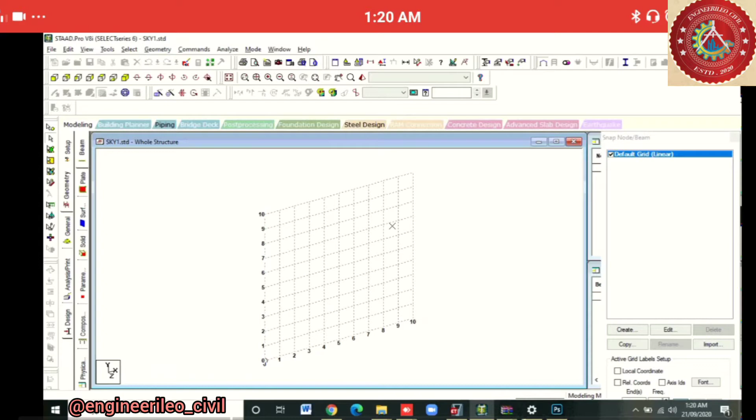सॉफ्टवेयर ओपन हो रहा है। सॉफ्टवेयर ओपन होने के बाद हम ज्योमेट्री में जाएंगे, ज्योमेट्री में रन स्ट्रक्चर विजार्ड से स्ट्रक्चर इंसर्ट करेंगे। ये एक स्काईस्क्रेपर है तो जाहिर सी बात है बहुत सारे फ्लोर होंगे उसमें, यानी हम 40 स्टोरी बिल्डिंग डिज़ाइन करने वाले हैं।

यहाँ पे फ्रेम मॉडल्स ले लेते हैं और बे फ्रेम पे डबल लेफ्ट क्लिक करते हैं। यहाँ पे लेंथ, हाइट, विड्थ और नंबर ऑफ बेज़ अलॉन्ग लेंथ, हाइट, विड्थ हमको डिफाइन करना है। तो मैं लेंथ और विड्थ 21 ले लेता हूँ और फ्लोर टू फ्लोर हाइट 3 ले लेता हूँ।

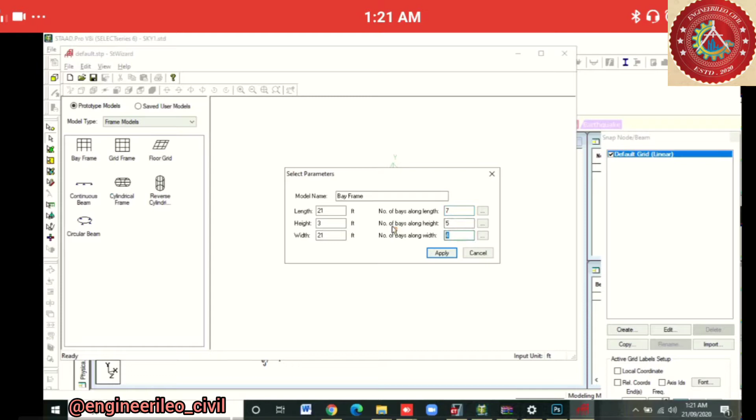क्योंकि ये 3 फीट है हम वहाँ पे 1 मीटर लेंगे, तो थोड़ा ध्यान रखना, आपके इसमें 3 मीटर डाल देना। नंबर ऑफ बेज़ अलॉन्ग लेंथ 7, नंबर ऑफ बेज़ अलॉन्ग विड्थ 7, और अलॉन्ग हाइट 1, फिर अप्लाई करेंगे।

देखिए मेरे पास ये फ्रेम स्ट्रक्चर आ गया है। मैं इसको दो तरीके से कर सकता हूँ, या तो फाइल में जाके मर्ज मॉडल विद स्टैड प्रो कर दूंगा, या मैं डायरेक्टली इसे क्लोज करके यस करूंगा, और विल टेक 0 0 0 ऑन XYZ एक्सिस। तो हमारा ये फीट में था इसलिए थोड़ा छोटा स्ट्रक्चर आया है।

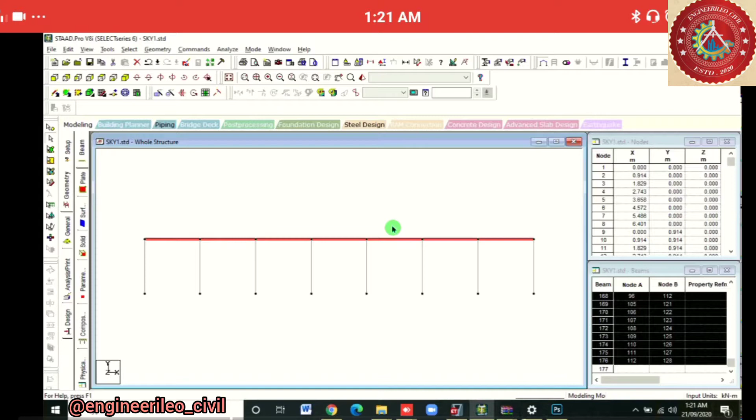कोई बात नहीं, मैं आपको सिखा देता हूँ, आप अपने हिसाब से उसको अरेंज कर सकते हो। ये हमारा स्ट्रक्चर बन गया है। हम इसके फ्रंट व्यू में जाएंगे और विल सिलेक्ट द टॉप बीम्स, फिर विल डू ट्रांसलेशनल रिपीट इन वाई डायरेक्शन।

टोटल 9 स्टेप्स और स्पेसिंग 1 मीटर क्योंकि वो 3 फीट थी, और विल लिंक स्टेप्स एंड ओके। तो हमारे स्ट्रक्चर का कंटिन्यू होना चालू हो गया है। देखिए ये बन गया हमारा 9 स्टेप्स।

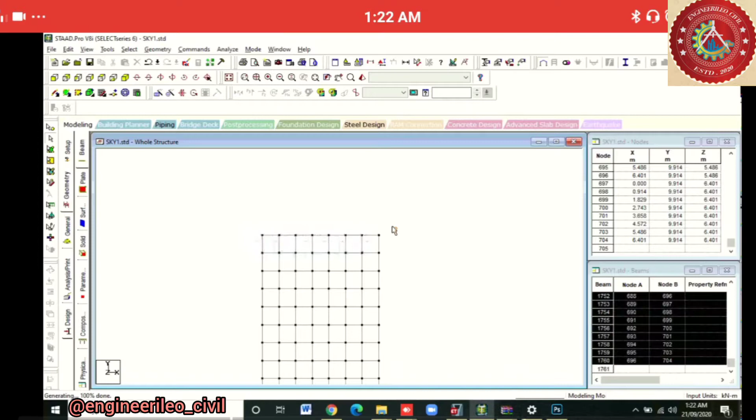अब इसके टॉप स्टोरी में जाएंगे। टॉप स्टोरी की बीम सिलेक्ट करेंगे, राइट क्लिक, न्यू व्यू, और फिर डिस्प्ले द व्यू इन एक्टिव विंडो। तो हमारे पास ये आ गई है, हम इसके टॉप व्यू में जाएंगे।

टॉप व्यू में ऐसे दिखता है। हम बीम कर्सर लेके अंदर की बीम्स सिलेक्ट करेंगे, तो ये बीम सिलेक्ट हो गई है। हम वापस डिस्प्ले होल मोड में जाएंगे, फिर ट्रांसलेशनल रिपीट इन वाई डायरेक्शन, टोटल नंबर ऑफ स्टेप्स 10, स्पेसिंग 1 मीटर, और विल लिंक द स्टेप्स एंड ओके।

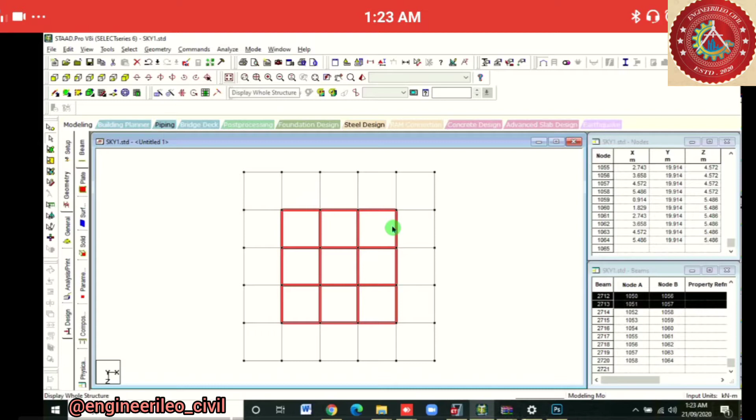टॉप व्यू में हम बीम्स इनसाइड पार्ट ऑफ सिलेक्ट करेंगे। आप देख सकते हैं मेरा कर्सर अटक चुका है स्क्रीन में, आई एम सॉरी फॉर दैट, सम सिस्टम प्रॉब्लम्स। फिर विल गो टू होल स्ट्रक्चर, डिस्प्ले होल स्ट्रक्चर एंड ट्रांसलेशनल रिपीट।

ट्रांसलेशनल रिपीट इन वाई डायरेक्शन और स्टेप स्पेसिंग 1 मीटर। यहाँ पे 3 मीटर लेना था लेकिन मैंने फीट में बना दिया इसलिए 1 मीटर ले रहा हूँ। नंबर ऑफ स्टेप्स लेंगे हम 10, लिंक स्टेप्स एंड ओके।

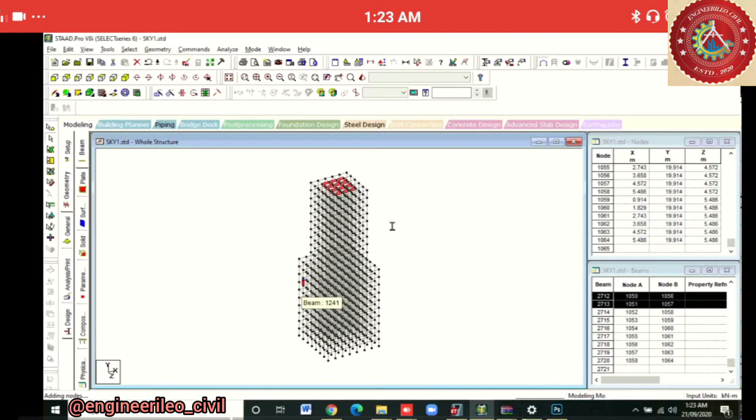ठीक है, ये ट्रांसलेशनल रिपीट हो रहा है। अगेन विल गो टू डू द सेम प्रोसेस। नाउ विल टेक अगेन द टॉप स्टोरी एंड न्यू व्यू, डिस्प्ले द व्यू इन न्यू विंडो एंड टॉप व्यू, और फिर वी आर गोइंग टू सिलेक्ट द बीम्स ओवर हियर।

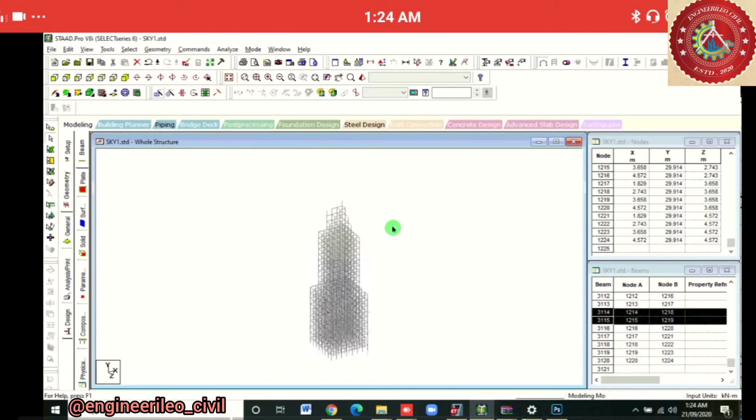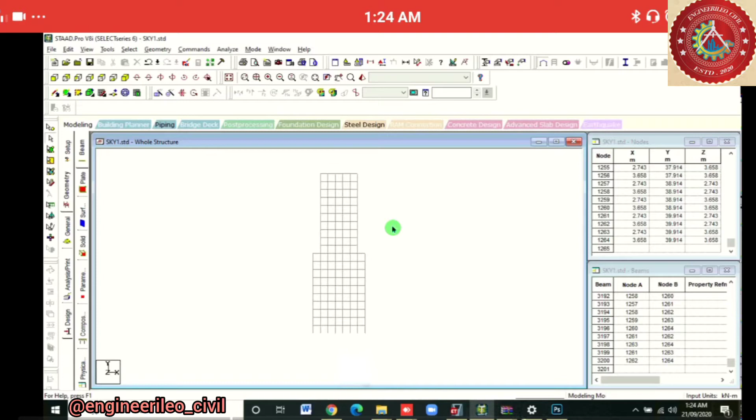तो हमारा देखिए ये पूरा स्ट्रक्चर हमारा कंप्लीट हो चुका है। फिर हम एकदम नीचे फ्रंट व्यू में जाएंगे। फ्रंट व्यू में जाने के बाद इसकी एक ग्राउंड फ्लोर, जो फर्स्ट फ्लोर वाला है ना बीम, ये सिलेक्ट करना है।

ओके, फिर विल गो टू न्यू व्यू एंड डिस्प्ले न्यू व्यू, फिर टॉप व्यू। टॉप व्यू में हमें यहाँ पे प्लेट्स क्रिएट करनी है, तो विल क्रिएट अ प्लेट्स फ्रॉम हियर एंड दिस पॉइंट, वी विल क्रिएट अ प्लेट्स फ्रॉम हियर, 4 नोड प्लेट्स, दिस पॉइंट, देन टू दिस पॉइंट, देन दिस पॉइंट, एंड एट लास्ट दिस पॉइंट।

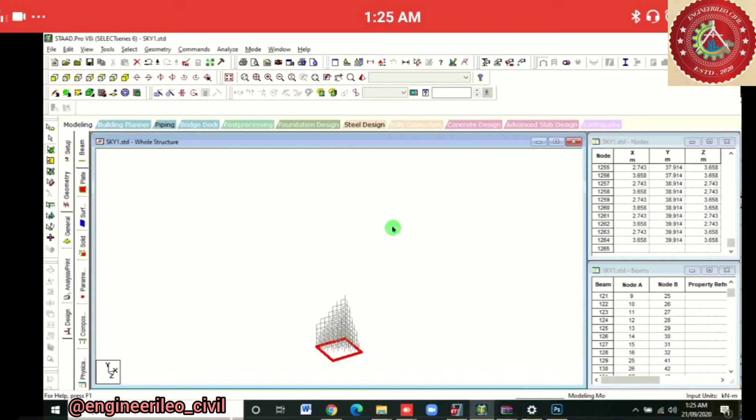विल ट्रांसलेशनल रिपीट टू दैट प्लेट इन वाई डायरेक्शन इन 1 मीटर डिस्टेंस, एंड नंबर ऑफ स्टेप्स इज़ 9, एंड लिंक स्टेप्स - नो, वी डोंट हैव टू लिंक स्टेप्स, एंड देन ओके। तो हमारी ये प्लेट्स ट्रांसलेशनल रिपीट हो रही है।

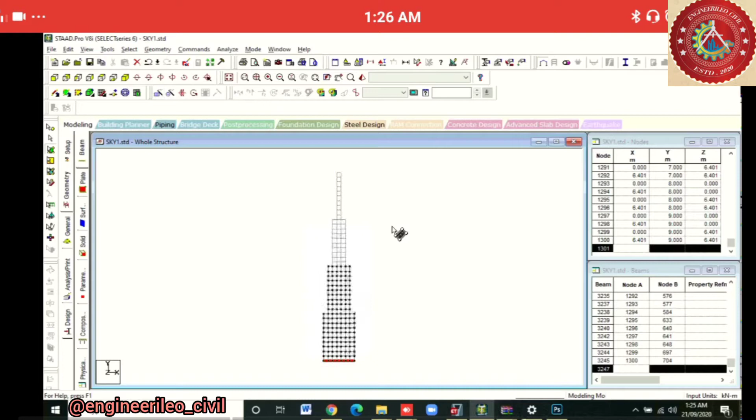फिर विल गो टू फ्रंट व्यू एंड देन विल सिलेक्ट द बीम्स ऑफ दिस लेयर। यू कैन सी ओवर हियर आई हैड सिलेक्टेड दिस, सिलेक्ट इट वेरी केयरफुली।

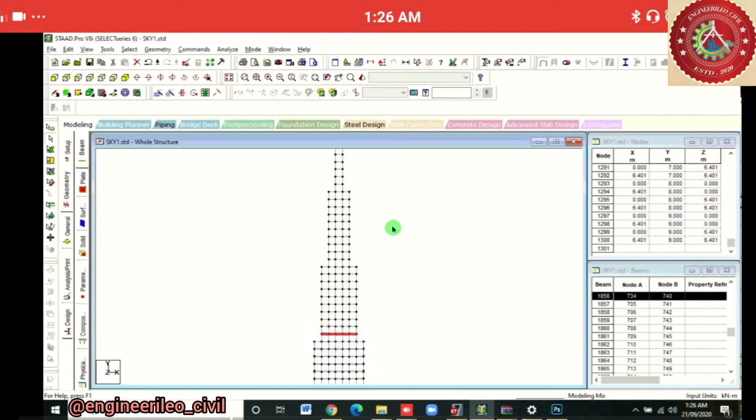You don't have to select the columns overhead. Okay, I had selected this. Again right click, new view, display, and then OK.

Then we'll go to top view and add a 4-noded plate. First this point, then this point, then the third point, and then the fourth point. So plates are added. We'll select this plate and go to whole structural view. We'll translational repeat this plate in Y direction, default spacing is 1 and number of steps is 10. We don't have to link the steps, and then OK.

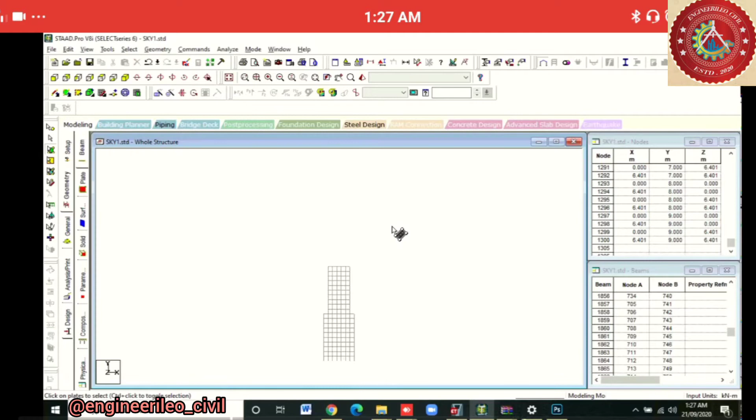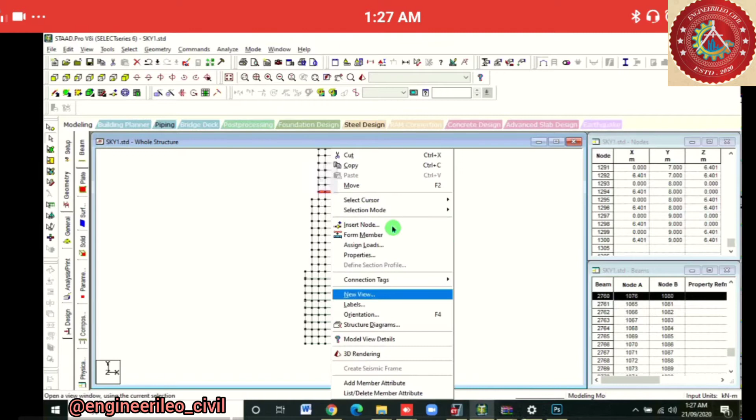We've completed 2 steps, first and second. Now it's turn for the third one. We'll select these beams carefully, right click, new view, display whole structure in same window, in the active window, and here we'll add 4-noded plates, point number 1, point number 2, point number 3, and point number 4.

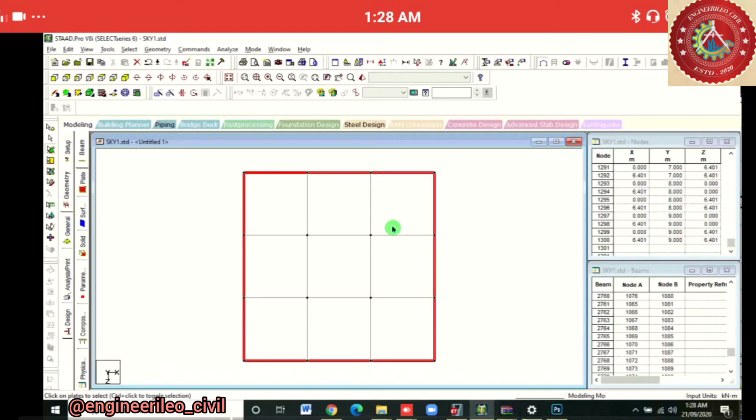And then we'll select this plate and view whole structure, translational repeat in Y direction in 1 meter spacing, total number of steps 10, do not link the steps, and then OK.

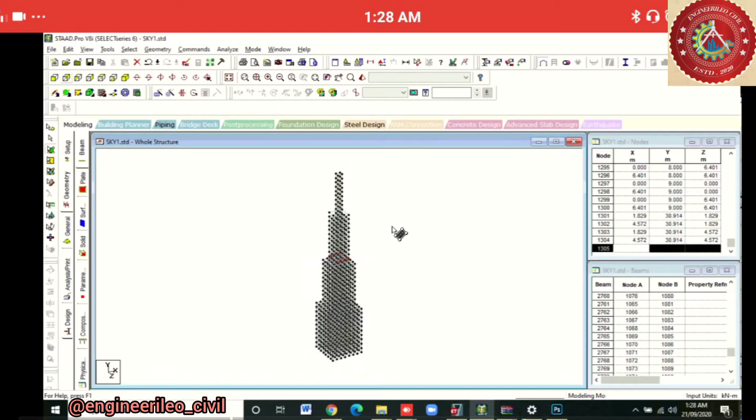So here the plate has been translational repeated, and then we'll go to front view and see that an extra plate has been created over here. Again the plate cursor, we'll select this plate, delete, OK, OK, OK.

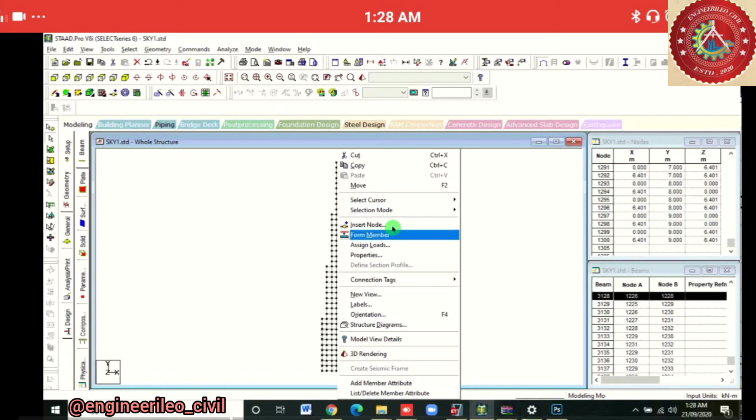Then for this last one we'll again select this part, right click, new view, and then display, OK, top view, and then we'll create a plate from this cursor to second point, third point, and fourth point.

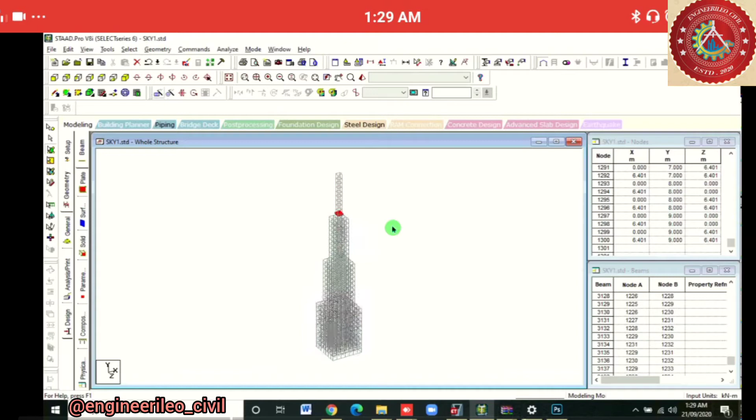We'll select the beam, select the plate, display whole structure, translational repeat, Y direction, spacing is 1, steps are 10, do not link the step, and then OK.

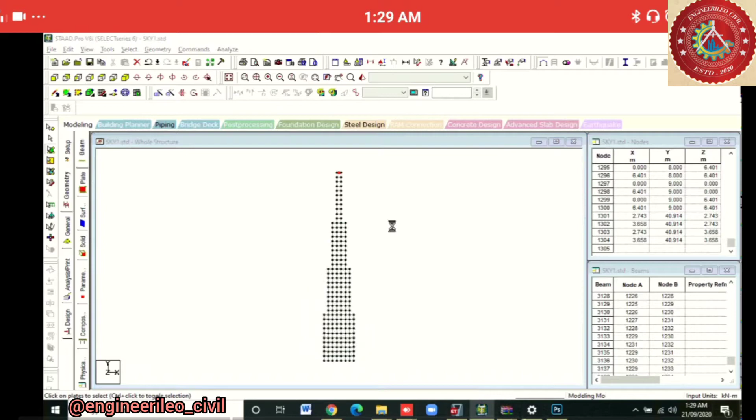And finally we'll go to front view because one plate has been generated extra. We'll delete this. Okay, yes.

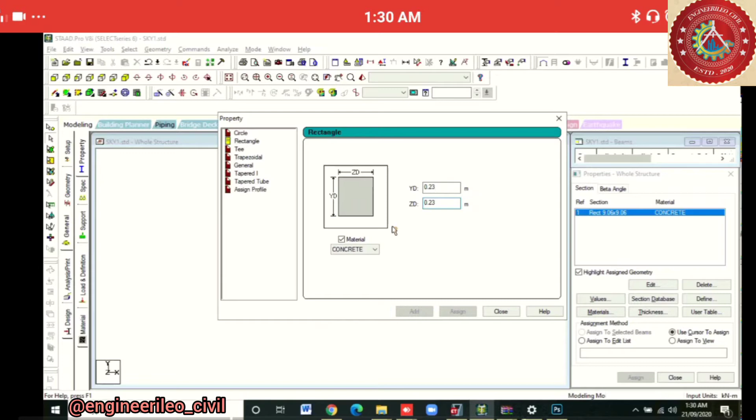Now we'll go to general view, general menu. There we'll add property, then we will define property. I am taking the same size for beam as well as for column for easy designing. You can take different sizes. I'll take here 0.23 meter by 0.23 meter size of beam and column, and close.

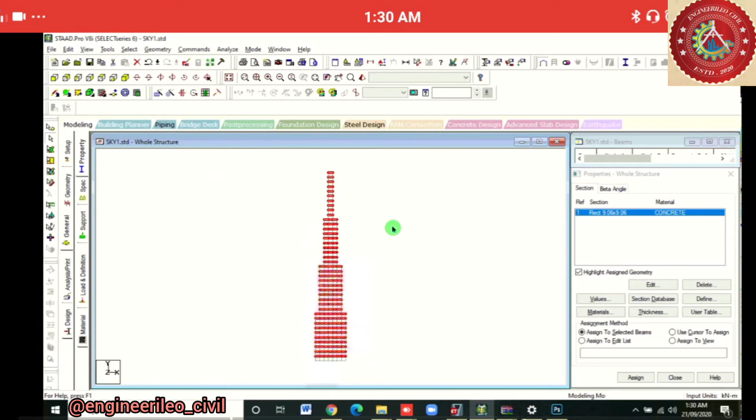Then I'll assign for beam, select. We'll go to select for assigning beam, select beams parallel to X and select beam parallel to Z. Here the beams will be assigned. For assigning column we'll go to select beams parallel to Y, so columns will also be assigned.

We'll go directly to assign to view and then assign, and yes. All the members, all the beam and column elements will be assigned over here. You can see that thing.

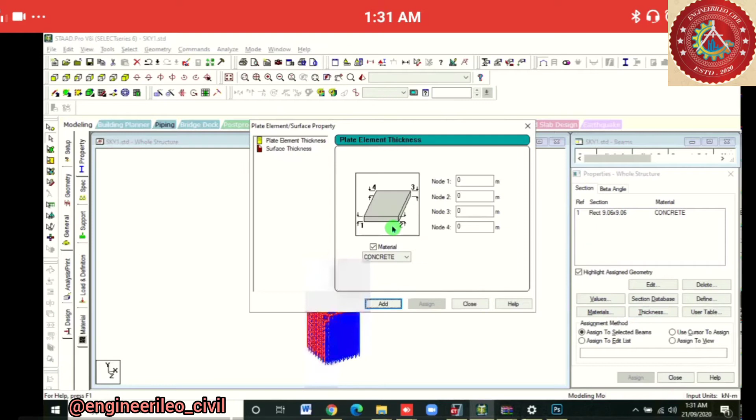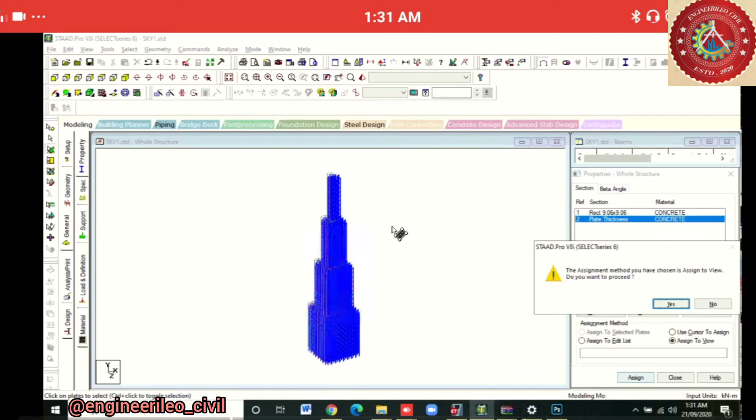Then we'll again go to property. We'll add thickness to the plates, a thickness of 0.2 meter, add and close. Again you can go from plates cursor and select whole plates, or directly go to assign to view and assign, and yes, the whole plates will be assigned automatically.

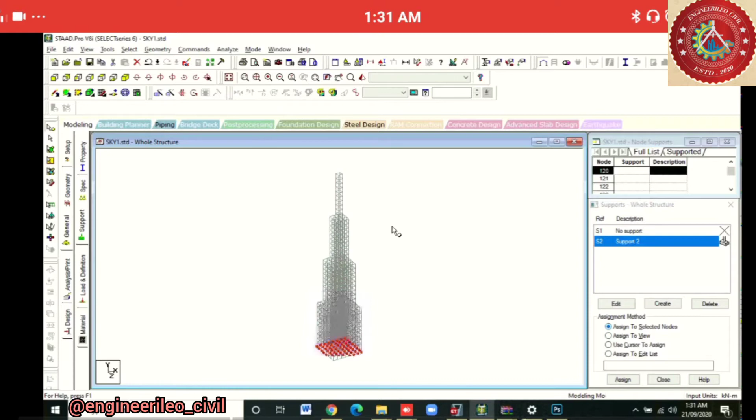Then we'll go to give the support. Support will create a fixed support, add, and then go to front view. We'll select the nodes of the bottommost part, select the support, and assign the supports to the selected nodes. Assign, yes. The support is assigned.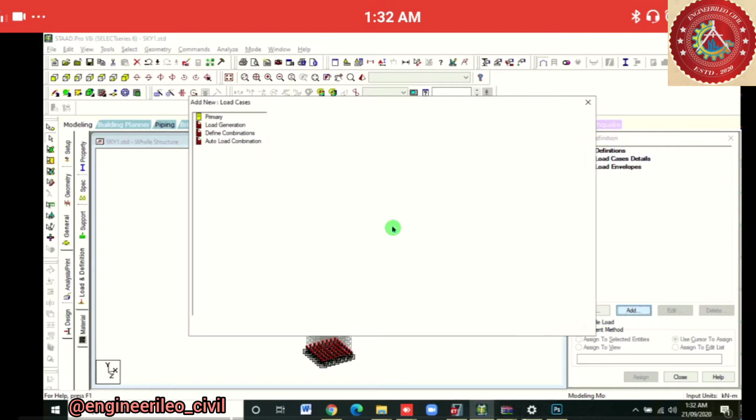Then we'll go to load and definition. Because it's a skyscraper building, different types of load will act on it, like wind load, dead load, live load. In general I will take live load and dead load only, and will not consider wind load in this case because the video will become too lengthy. If you want to learn the wind load part, you may refer to the water tank video. So we'll go and add dead load and add, and live load.

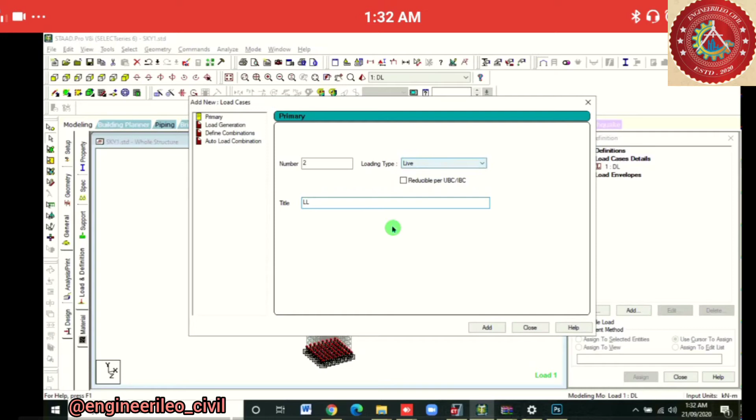We have defined the parameters here, add and close. In dead load we'll add the self weight, add, close. The self weight will be assigned to view, assign, yes.

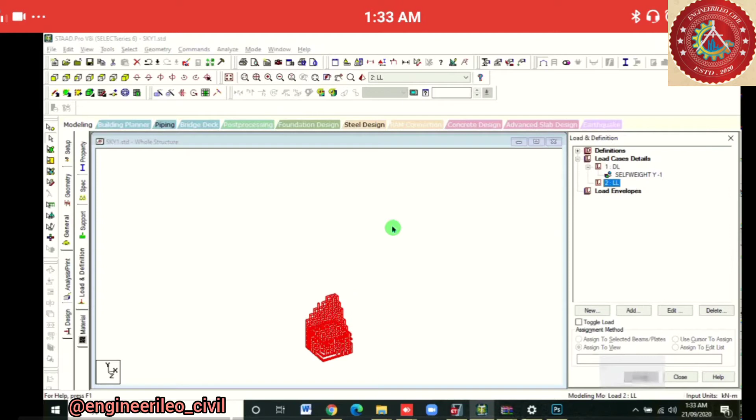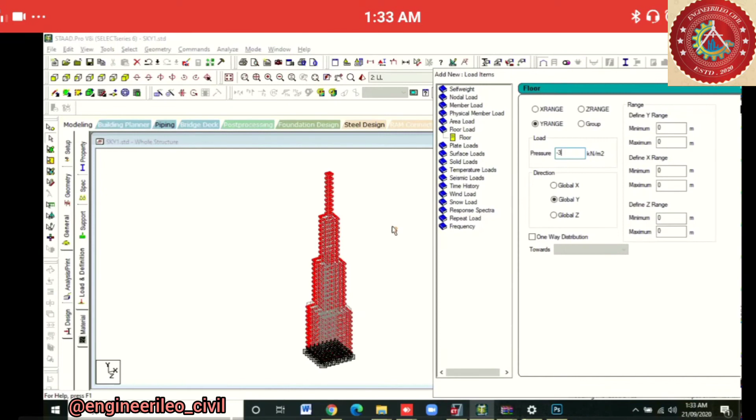In live load we'll add floor load. We'll go to floor load. I'll add -3 kilonewton per meter square in Y range direction, and minimum and maximum we'll check it out. We'll go to node cursor, go to the lowest node, double tap on that thing. The lowest node is Y 1 meter.

Close. We'll go to the topmost node, select that and double tap on that: 39.914. Close. Minimum we'll write 1 meter, and in maximum we'll write 39.914.

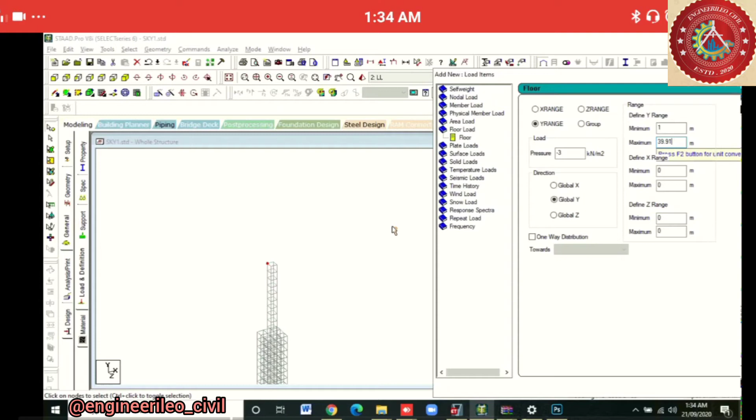Okay, my mouse had been stuck. Excuse me for a minute.

So we'll add over here and then close. So our dead load and live load has been added.

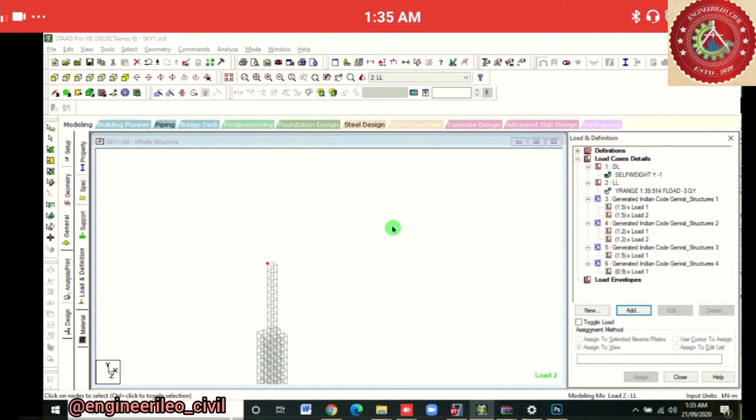Then we'll go to load case details and add some load combination. We'll generate it automatically using IS codes, generate loads, and then add and close. We'll go to print and analysis, and we'll add a print with no print, close, analysis, run analysis, save the structure, and the analysis is running.

It will have to give us 0 error. If error came, then we need to resolve it by going to the output file. Okay, and let's see what happens.

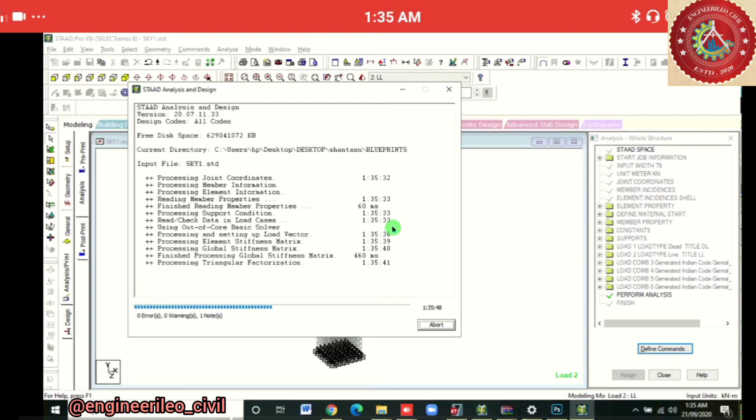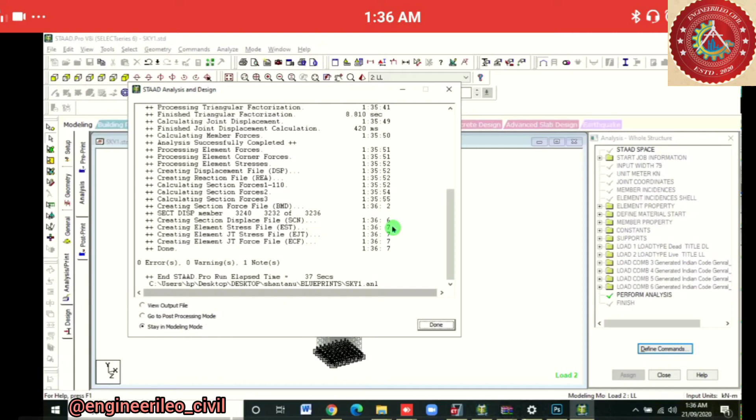Okay, the analysis is done. Now we will design this building. We'll go to the design part. We'll design it for concrete, and the code is IS 456, the Indian code. We'll select parameters, and we'll take FC and FY main.

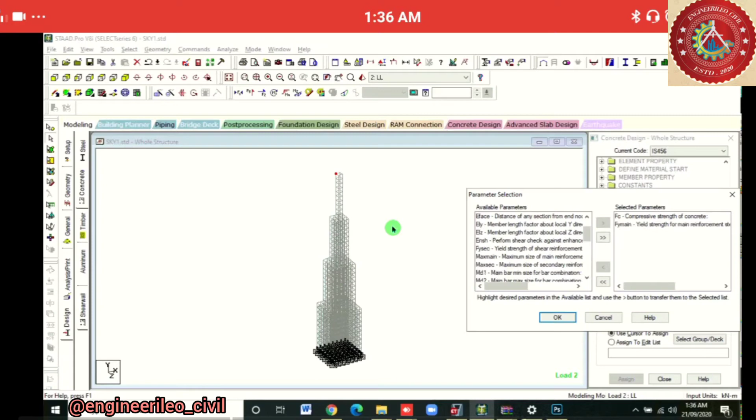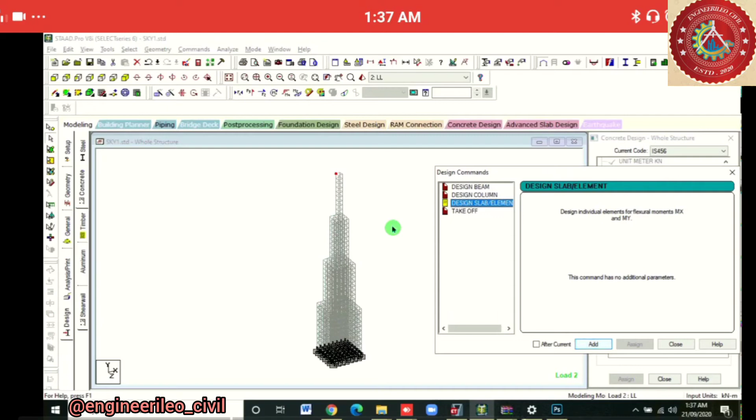Then we'll define the parameters. In FC we're taking 30,000, add, and FY main we'll take 500,000, add, and close. In commands we'll add beam command, column command, slab and element command, and then take off, close.

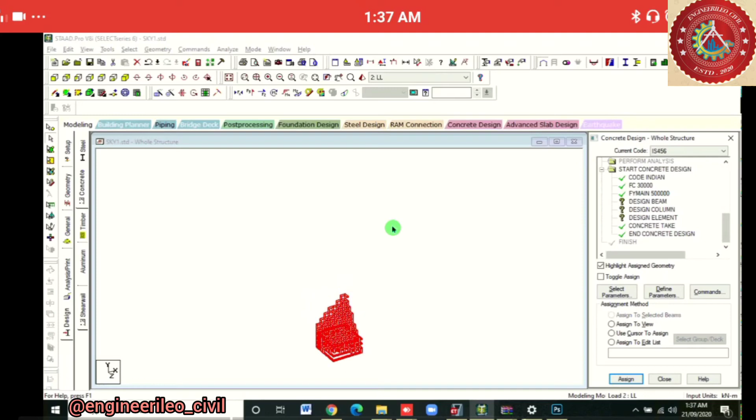So we'll assign these to view. Assign to view, yes. Then FY main, assign to view, yes. Then design of beam: we'll take a beam cursor, we'll select the whole beams, assign, yes.

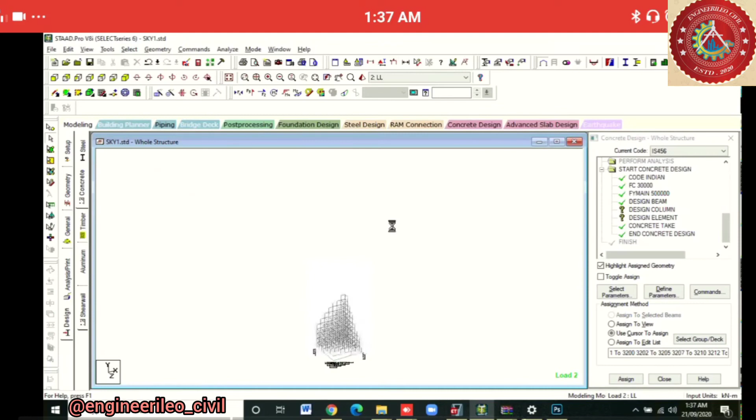Oh, sorry. In beam cursor we need to select only beams, not columns. Here we have selected the columns also. We can't select the whole at once. Okay, select beam, unselect this, select beams parallel to X and beams parallel to Z. Then assign and yes.

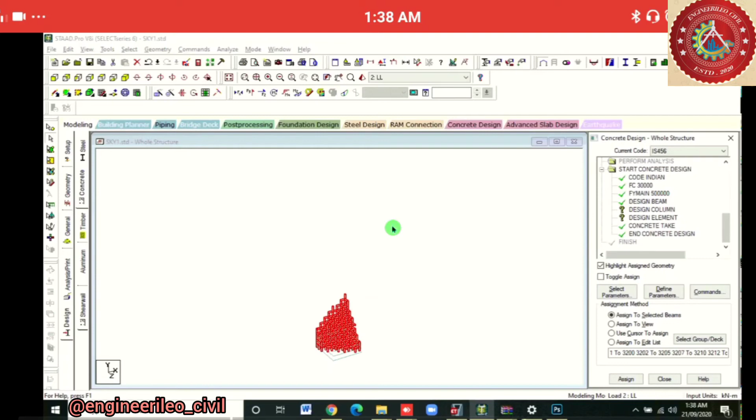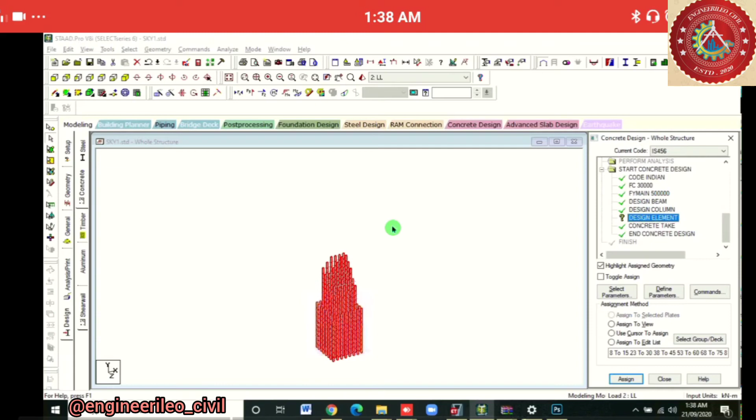After assigning these, we'll assign to column. To assign to column, we'll select beams parallel to Y direction. Again in select, go and take beams parallel to Y direction, and assign, yes. In the design element part, we'll select the plate cursor and select the whole structure. So all the plates here are selected, and then assign, yes.

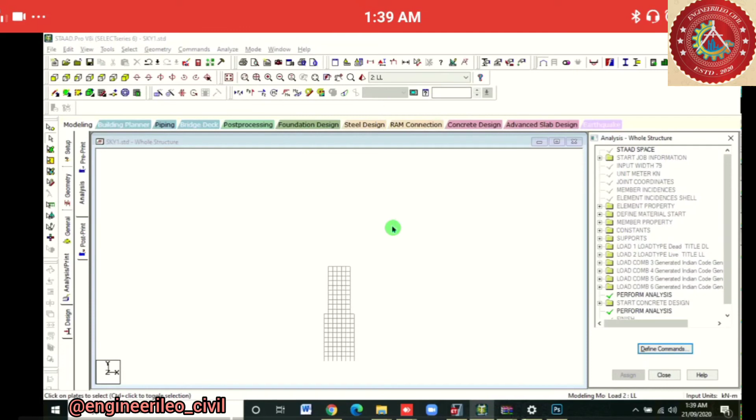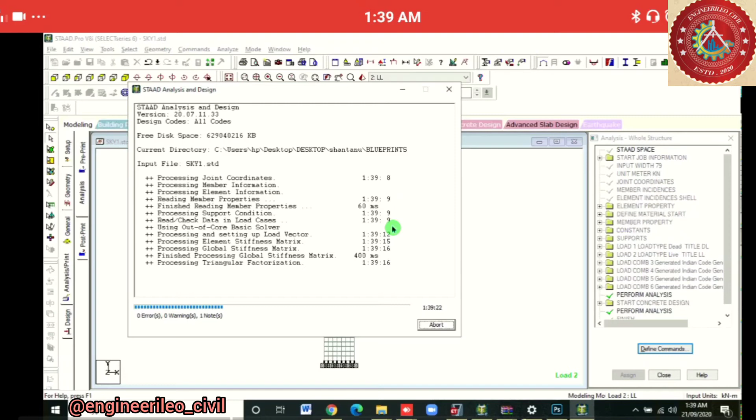Then we'll again go to analysis and print, add, close, and analysis, run analysis, save. So our analysis is running, and if an error comes, we'll resolve it. If it doesn't, we'll go to post processing mode and see the different kinds of stresses on the plates. Let's see what happens. The design is almost done.

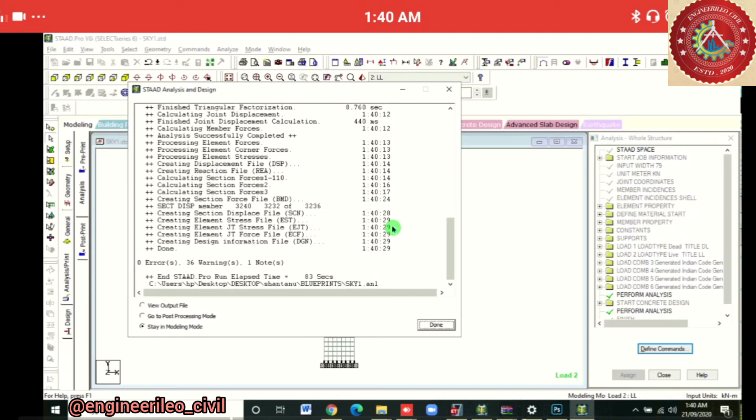Okay, warning numbers are increasing. The structure has 40 stories, that's why it takes a little more time. Don't panic, it will take some time. And here we are done. Then we'll go to post processing mode.

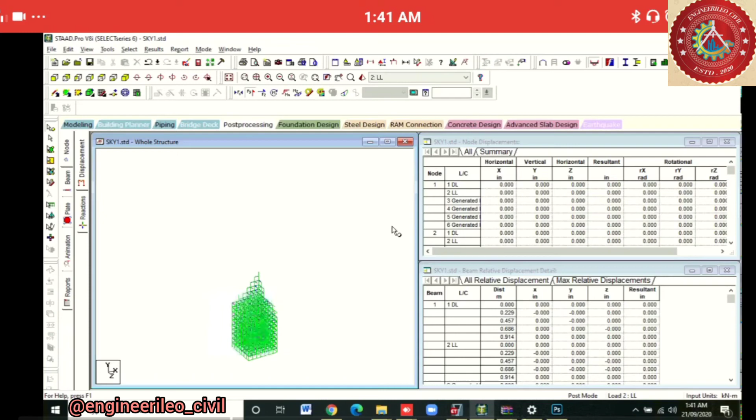We have entered the post processing mode, and we'll see the structure. This is a 3D model. We can see the axial and shear stress on the structure. We can see the shear stress. Are you able to see that the shear stress is the blue lines on the structure? You can see it if I zoom it for you.

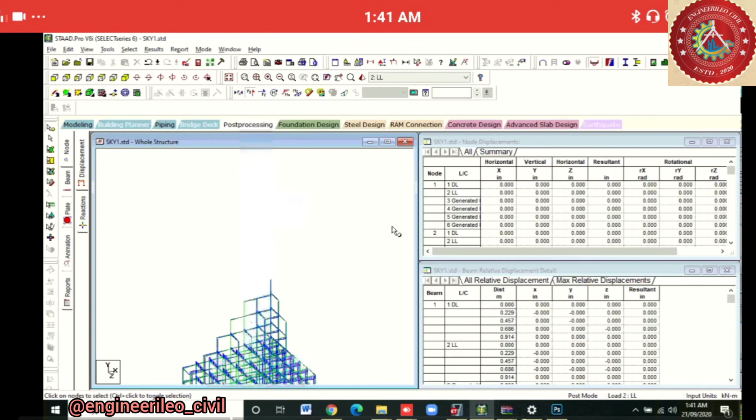Yeah, see this. These are the shear stresses developed in the structure. You can see it more clearly now, right? If I go to front view, you'd see it more clearly. Yeah, these are the shear stresses developed in the structure, the shear force diagram.

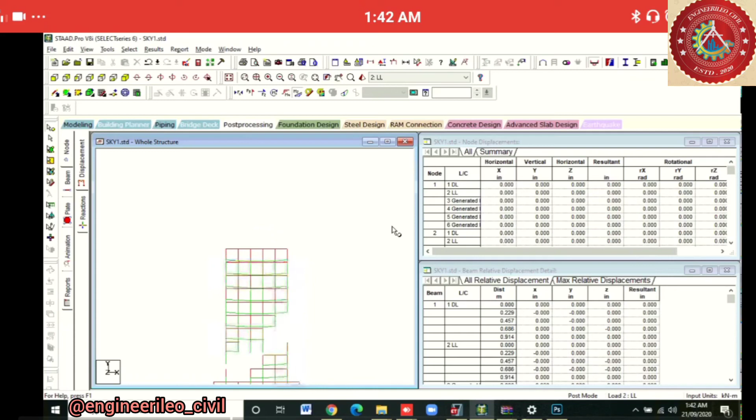We'll close this. This is the axial diagram of the structure. We'll close this. This is the bending moment diagram of the structure. You can see that. We'll close this also, and we'll see the stresses in plates. The structure will deform in that way. We'll take a load combination, maximum absolute, apply, and then OK.

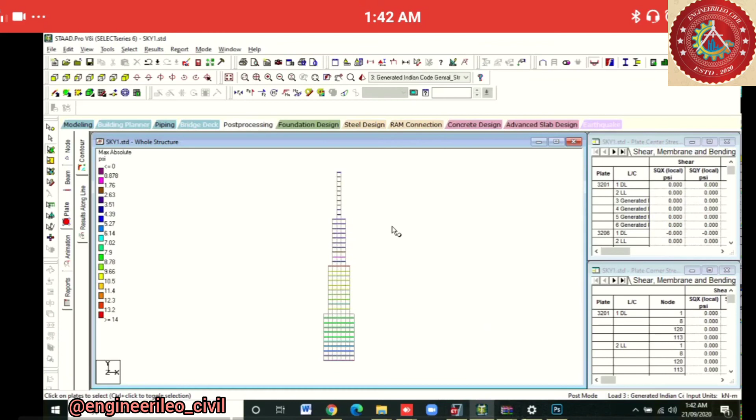So here is the plate. You can see that. Here's your plate, and we'll do some animation part. Deflection.

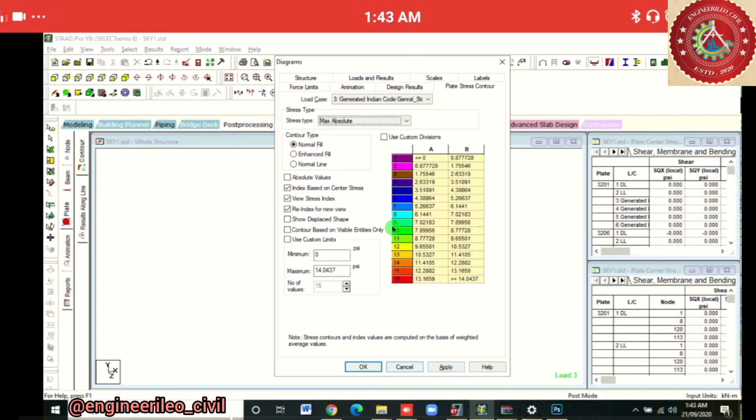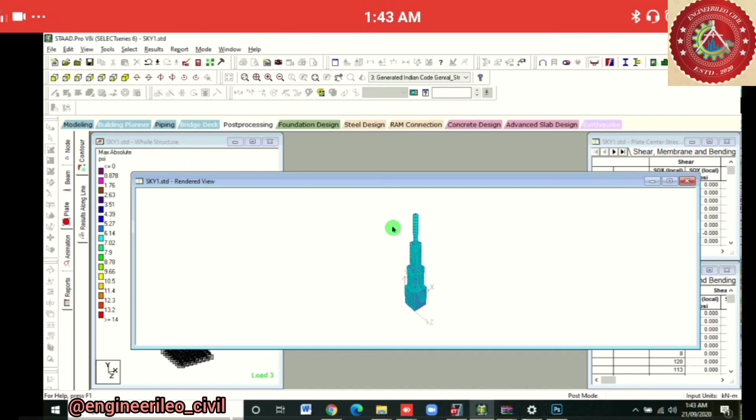It's loading, and here we go with the 3D rendered view of the structure. We'll just get this part a little nearer, and a bit closer. With the help of the zoom key you can zoom it, or dynamic zoom.

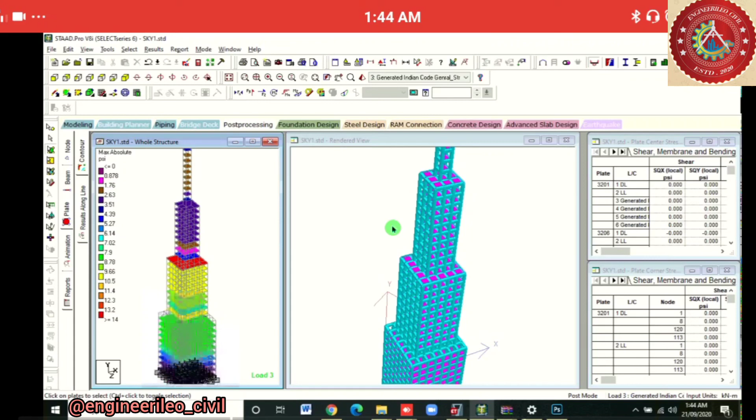Yeah, you can see the structure now. The structure is visible. You can move the structure with the left key. The pink ones are the plates, and the blue ones are the beams and columns, the rectangular sections. So here we go, and these are the stresses on plates. The different colors show different magnitudes of stresses.

Okay, and here we end the lecture. We'll just zoom it out.